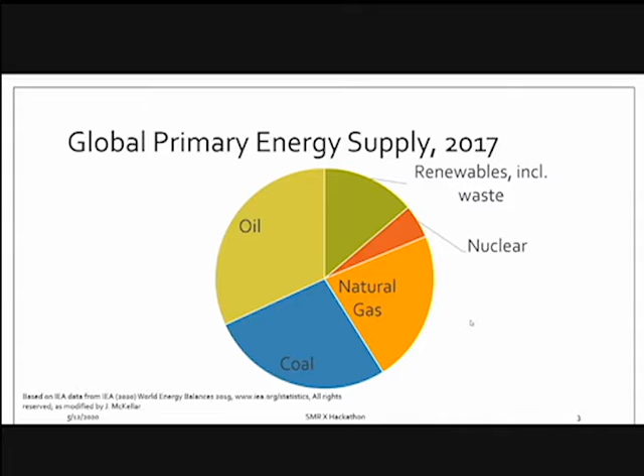So to start off, we've got an image here showing the global primary energy supply. So worldwide, where is our energy coming from? And from here, you can see we're really dominated by fossil fuels, right? Oil, coal, and natural gas still make up the majority of our energy. Nuclear is a respectable chunk. It's not widely used around the world. And then our renewables, including the use of waste, represent about 14% of our global energy use.

In Canada, we're sort of similar. It depends on whether we're looking at total primary energy or electricity. So in terms of total primary energy, again, we're dominated by our fossil fuels, oil and natural gas. Oil would be used a lot for transportation, so our source of gasoline and diesel. Natural gas, of course, used for electricity generation as well as for home heating. And then we've got a smaller fraction of coal that's still used in some provinces. We've got nuclear, hydro, and our other. And so our renewables fall into this other category.

Though this other category, our renewables represent about 5% of our total primary energy supply. So that's biofuels and waste, wind, solar, etc. If we include hydro in that number, we're up to about 16% of our total primary energy supply. So that's not too bad.

I should say that, when it comes to choosing energy sources, countries and provinces tend to use what they have, right? The less you have to import, generally preferred. So in Canada, we're lucky in that we've got a pretty wide range of energy resources available that we can choose from. So we've got big reserves of oil and natural gas. We've got uranium reserves. We're also lucky in that we have a lot of hydro available to us. It's not evenly distributed across the country, of course, right? So our oil resources tend to be out west and off the east coast. Hydro is widely used in British Columbia, Manitoba, and Quebec. So it depends on what we've got.

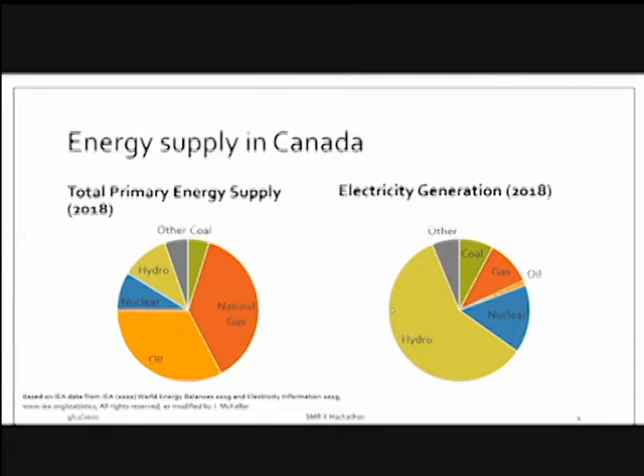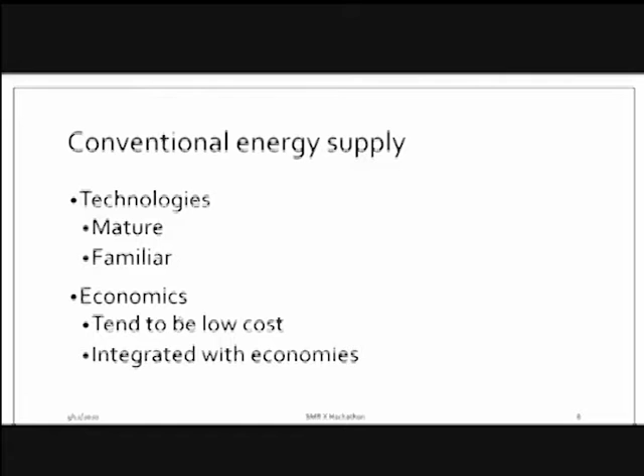Okay, so that's sort of the picture of conventional energy supplies and why we're still using them, and why it's hard to shift away, but then we have reasons why it's a good idea to do so. So if we're going to shift away from conventional energy, we're really going to have to replace it with something else, right? We can reduce our energy use, we can increase energy efficiency, but we're not going to be able to totally get rid of it. So we're going to need to replace our conventional energy supplies with something else.

Renewables are one of the options available to us. I have a slide with different renewable energies, but just to frame the discussion, we've got wind, solar, biofuels, hydro, right? Some of these technologies are mature. We think of renewable energy as being cutting edge and brand new and something we haven't really tried before. But in reality, it has been around for a long time. Hydro, for example, we've been using for hundreds of years at least.

It does tend to be less familiar though, right? So hydro is one that we are used to, but something like solar, even though solar has actually been around for a long time, still seems quite new to us. So if you were thinking of putting a solar panel on your roof, you might be concerned, well, I don't really know how it works. Nobody else has one. Why would I want to do that? So the familiarity is still not really there.

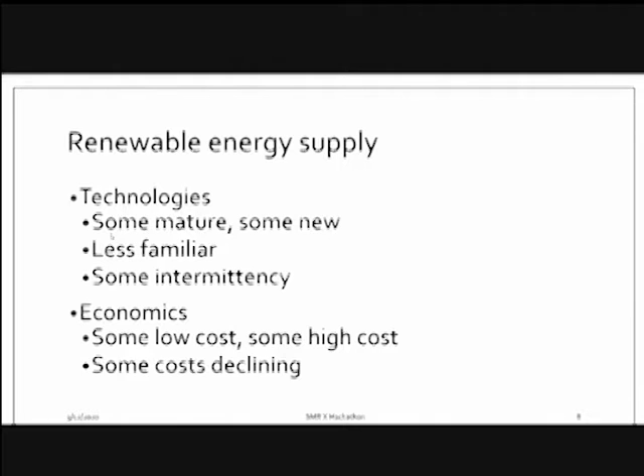Renewable energy is not perfect. So as I said, we have the problem of intermittency, and we have problems with cost in some cases. They're also not perfect environmentally either. So the energy density of a lot of renewable energy technologies is quite low.

So to get the same amount of energy as a natural gas fired power plant, you would need a considerable land area for solar, right? So that takes up land. So that's a problem. It can also have impacts on wildlife. So it might be habitat destruction. It could be using farmland.

That's obviously not ideal. So there are options to put solar on rooftops, for example, right? That's sort of a better approach. But again, you do need a lot of area to get a significant amount of power. There are also impacts on humans. So I've got aesthetics here.

So wind turbines are often seen from a negative perspective. So if you go to a community and say you want to install a wind farm, sort of on the outskirts of town, for example, I would expect that the people living in that town would not be happy because, you know, they like their rural environment, they like the natural environment as they see it. They don't necessarily want to be looking at wind turbines, right?

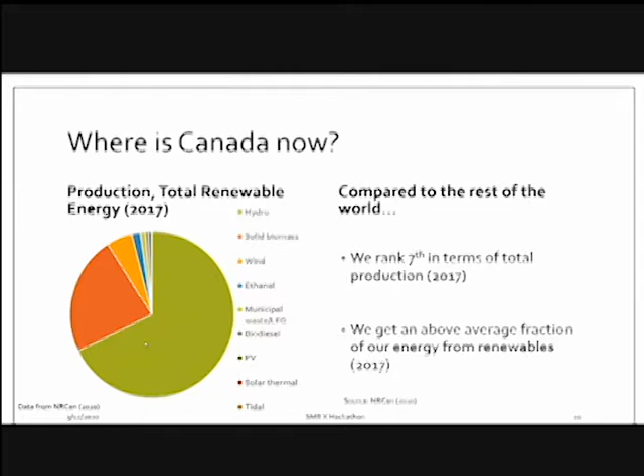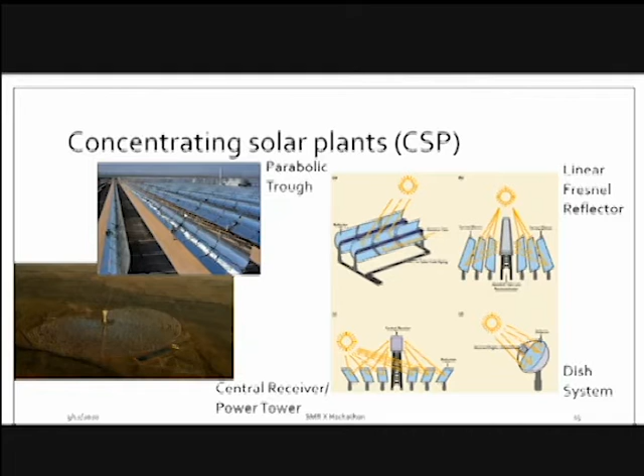You also have to keep your mirrors clean. So this one is sort of like in a vegetated field. This one is, I believe it's in Arizona, perhaps more of a desert environment, and so there's dust, right? And so if you want your light to reflect off your mirrors properly, you need to keep them clean. So washing the mirrors is another piece of the puzzle for getting these CSPs to work.

So for solar energy, just because we've said a fair bit about it, the advantage is we have no emissions at the point of generation. So there's no combustion, so no greenhouse gases, no smog emissions. The PVs are relatively simple to operate. The concentrating plants take a little bit more work. And our PV costs have come down dramatically. So in 2000, we were at about $10 a watt. And by 2013, we were less than $1. So that's a big drop in a relatively short amount of time.

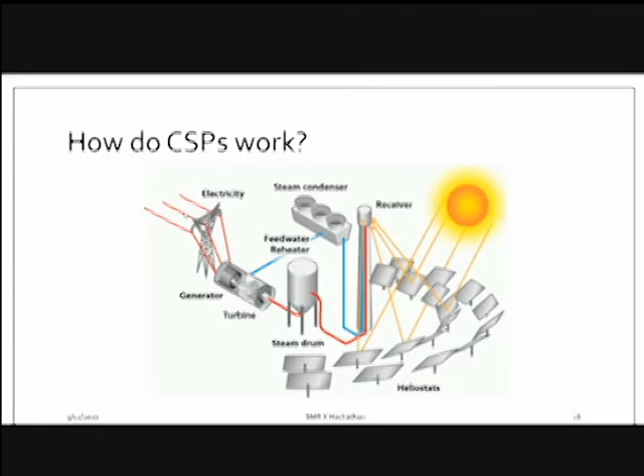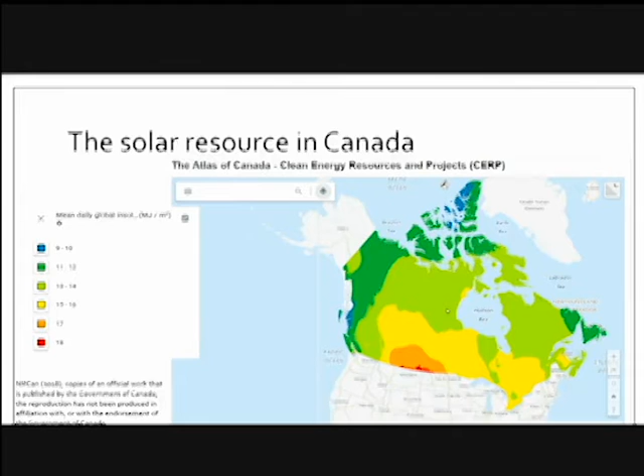And then, of course, because we're far north, in the winter our days are really short, right? So in the Arctic, in the territories, they do have some solar panels and some solar systems, but in the winter, they're not going to generate at all in some cases. As we said, it takes a lot of land area, and it's fairly intermittent because you're only getting power when the sun is shining.

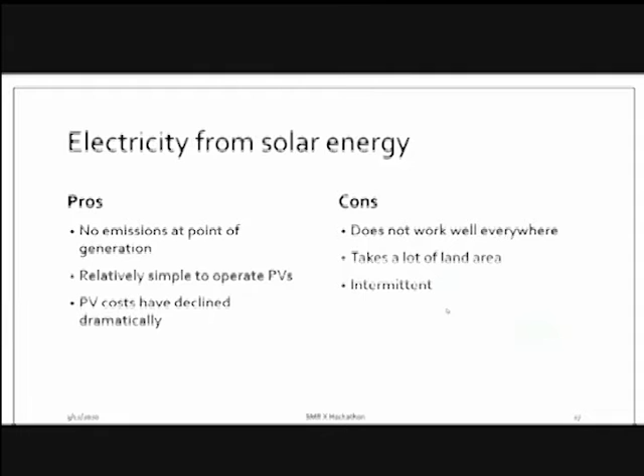Okay, I have to pick up the pace. So I did want to say just sort of quickly about wind. So wind is one of the more economic choices in terms of renewable energies. In 2018, there were 592 gigawatts of capacity installed globally. Solar was 505 gigawatts. So we've got slightly more wind than solar.

But we've got a lot more wind than solar in Canada. For solar, we had 3 gigawatts. For wind, we have 13. And this is just sort of a basic equation of how power is generated from a wind turbine. So really, it's a function of the density of air, which is not something we tend to think about maybe, but air does have a density, a weight per unit volume. So how much weight per unit volume does the air have?

The area, the swept area, so when these turbines spin, it makes a circle, right? So you want the area of that circle covered by the blades times the wind speed cubed. So the wind speed to the power of 3, that's a very important variable, right? A small change in wind speed could have a big impact on your power generation.

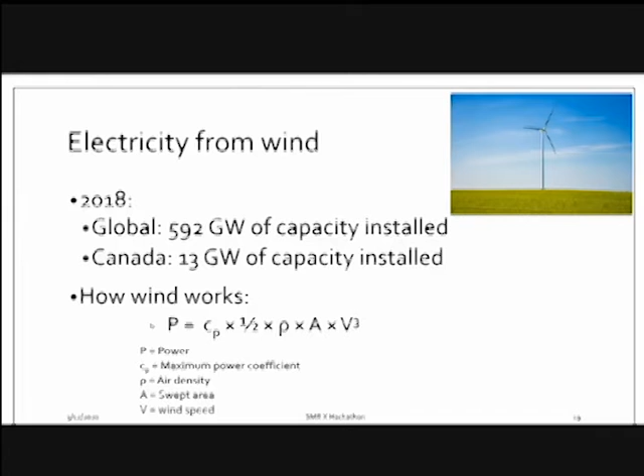Okay, and then this figure here is showing, just like we have a solar resource distribution in Canada, we have a wind resource distribution. So not everywhere in Canada is equally well suited to generating electricity with wind. The darker purple is better, right? So wind power density, watts per meter squared. And for a big sort of swath of the country, we've got light purple, right?

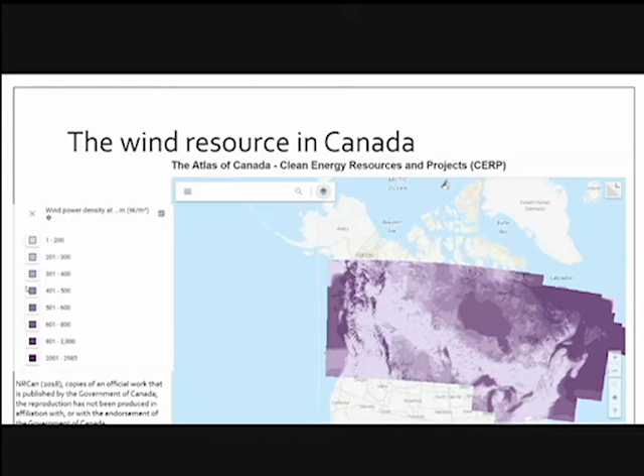And our best resources tend to be off the coasts, right? So here on the East Coast, some on the West Coast, a bit in the Rockies, right? As I said, we do have a fair bit of wind installed in southwestern Ontario, and it's a little bit hard to match up the colors. We're maybe around this range here, okay? Okay.

So in Canada, our electricity generating system is already relatively low environmental impact. As we saw in those figures early on, already a fair bit of our electricity nationally comes from renewable energy, largely due to hydro. But in terms of greenhouse gas emissions, in Canada, a lot of our greenhouse gas emissions come from space heating and from transportation. So for space heating, solar energy can also be used to provide heat.

So on the right here, we've got a very simple diagram. It's showing passive solar heating. So this is very simple. It's just house design, right? So you can design your house so that in the winter, the sun comes into your house and helps heat it up. If you've got sun heating up your house, you don't have to run your natural gas furnace, right? You don't have to turn on the baseboard heaters. And then in the summer, you can put an awning over your windows and keep the sun out. So then you don't have to run the air conditioner as much because you don't have as much sunlight coming in. So just simple things like that.

If you were building a new house and you wanted to design it specifically to take advantage of passive solar heating, you might have something like a thermal mass. So you might have concrete floors. The sun comes in the window all day during the winter, heats up the floor. The concrete absorbs the heat and is going to hold on to it. And then overnight, the floor will release the heat to the interior of the house. And again, you've cut down on the amount of natural gas you need to burn in your furnace.

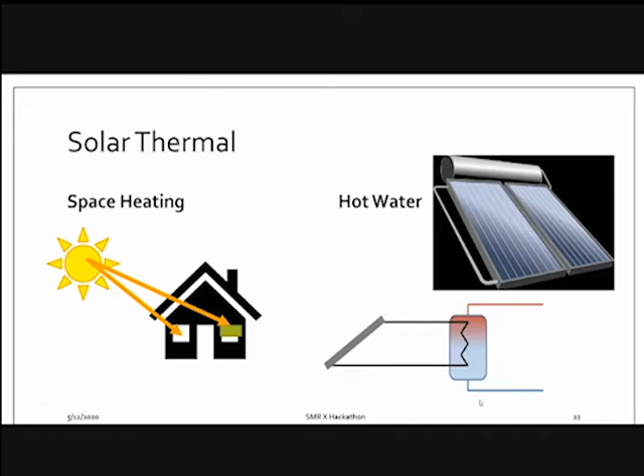Okay, one other method of heating is geothermal. So in this case, heat is transferred between the indoor environment and the ground, which might sound a bit weird because the ground is not room temperature, right? But using a working fluid, you can, in the winter, take heat out of the ground and transfer it to your space. Okay, so your space is heated using energy from the ground. You might need electricity to run a pump and a compressor.

Okay. And then in the summer, it can do the opposite, and it can take heat out of your house and return it to the ground. So it works like a refrigerator does. At Ontario Tech, we have a fairly large geothermal system providing heat for the campus. It's sized as a 1,500-ton borehole thermal energy storage system.

So the borehole part, that's the vertical pipes going down into the ground. If it were a residential type system, you could have, again, vertical pipes, or you might have it horizontal, so it takes up a large area sort of just under the grass. Okay. But this one is showing the borehole vertical loop design. At Ontario Tech, we have 370 boreholes going down 180 meters, and altogether there's 150 kilometers of piping transferring fluid back and forth.

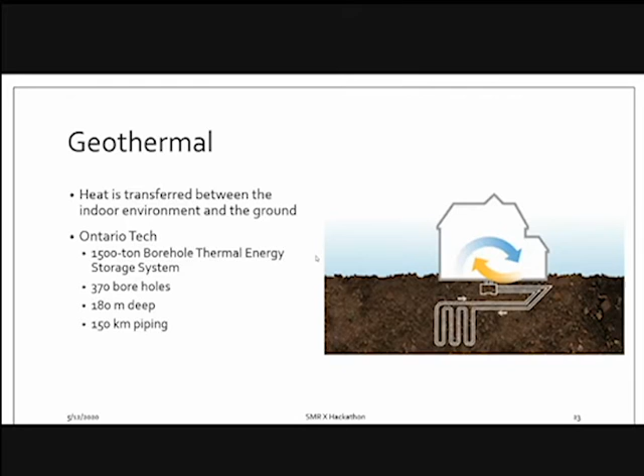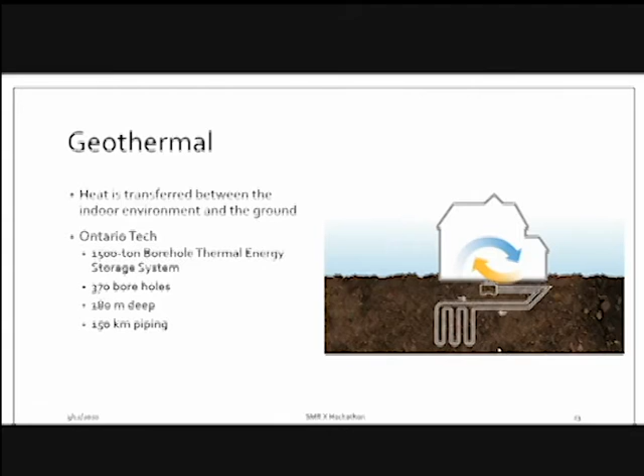So in the summer, when heat is being removed from the buildings, rather than just air conditioning, we can use the geothermal system to take heat out of the building. It's going to be stored in the ground, and then in the winter, we're going to take that heat back and put it back into the buildings to warm them up. Okay.

The last area I wanted to talk about was transportation. So again, a lot of our greenhouse gas emissions in Canada do come from our use of transportation, so burning gasoline and diesel just to get from point A to point B. One option to mitigate those emissions would be to electrify our transportation system, right? So use electricity, because as we've seen, our electricity system is already pretty environmentally friendly.

Another option is to use biofuels. So this can include ethanol and renewable diesels. So in Canada, we already do use biofuels. We're sort of mandated to have at least 5% by volume renewable content in gasoline and at least 2% renewable content in diesel. So when you go to the gas station and put gas in your car, you're already getting some ethanol with that.

There are designs of vehicles that can use much larger fractions of ethanol. So rather than 5%, you might be 80 or 85% ethanol. Ethanol is produced from crops, so in Canada, mostly from corn and wheat. Biodiesel comes from fattier types of plants. So soy or canola, waste cooking oil can all go to producing biodiesel.

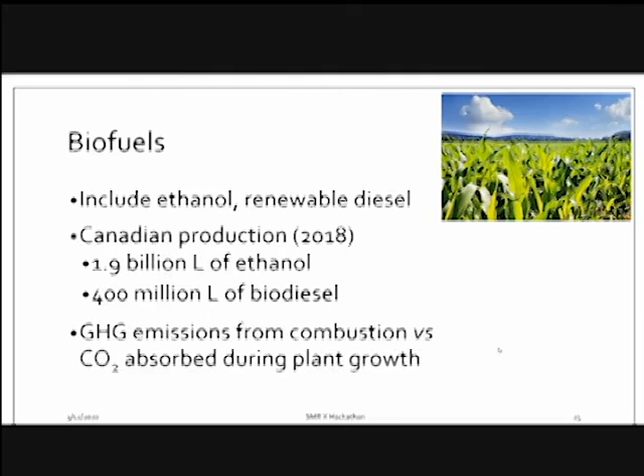Okay, there's a bunch of other emission sources involved, right? Because we need to process the fuel. We need to transport it from A to B. We need fertilizers to get the crops to grow. So it's not quite as simple as that, but that's sort of the idea behind using biofuels. Plus, we're not using a non-renewable resource, right? We can always plant more corn.

And the last thing I wanted to talk about just very briefly was hydrogen. Hydrogen is an energy carrier, not an energy source. So it's technically not a renewable technology, but it can be produced from renewable technology. Currently, most hydrogen is produced from methane, from natural gas. So it's not a low carbon fuel. But if you did produce it from a renewable energy source, then it becomes a useful energy carrier, a way of storing energy and then using it.

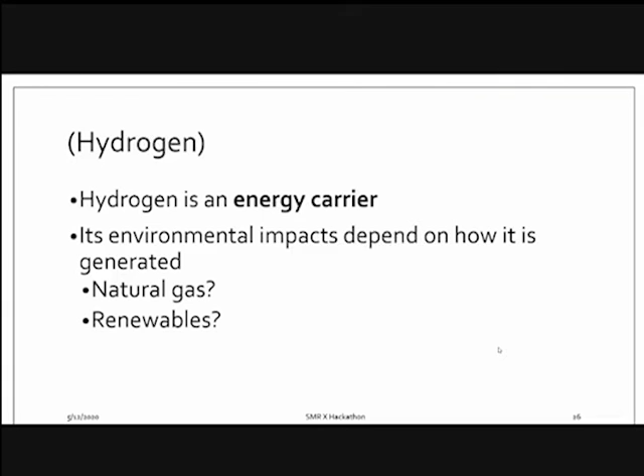Then when we want it, we can run it through a fuel cell to generate electricity. And then the fuel cell is going to output water as a waste product. We can feed that water back into our electrolysis system, add more electricity, generate more hydrogen. So we get a bit of a loop here. So that's one way that hydrogen is useful in a renewable technology-based system.

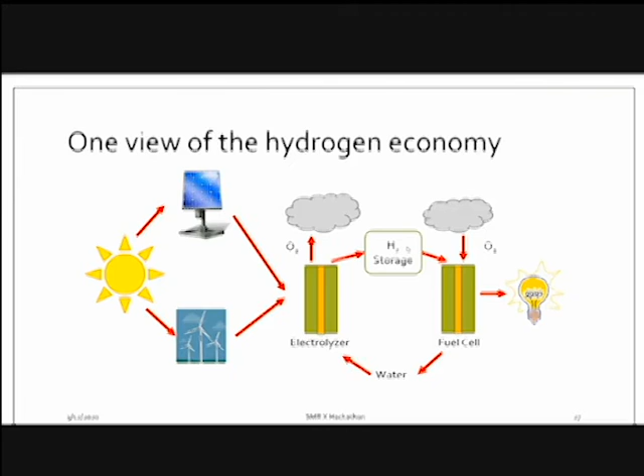So I said previously, solar is only available when the sun shines, right? So you need maybe batteries to back it up. Another option would be to have hydrogen to back it up. So when the sun is shining, we run electrolysis, we produce hydrogen, and then we've got that energy stored for when we need it. Okay, so I will stop there.

And I think I will come back to the main meeting here. Oops. Okay. So are there any questions? Oh, maybe I should.

It was a great presentation. Thank you. Okay. Very informative. I like the passion and the energy. I learned a lot. I think everyone else will. Good.

Jennifer, Filippo Genco here. I have a question for you. So based on what's happening now in Canada, well, the rest of the world, but in Canada in particular, with the price of oil and shale gas so low, almost close to zero, do you think this condition, which is of course temporary, but there are discussions about making it a little bit more permanent, essentially to kill the oil industry, might give more hope to use the natural gas, which has been produced so far for power generation, instead for hydrogen production? Do you see a possibility there in terms of economic development?